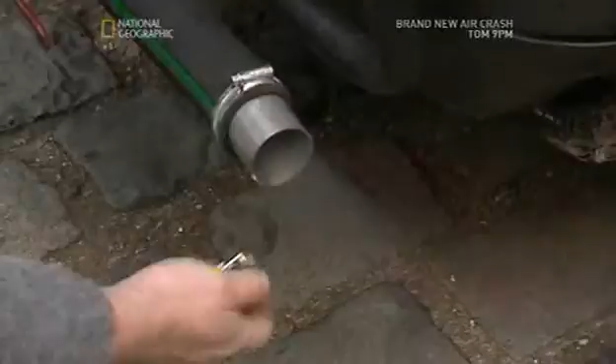This week, Dick and Jem take on their most bizarre challenge yet. Look at that. This is ace. They plan to run a pickup truck using a very unlikely fuel source. They've teamed up with a band of environmentalists who are trying to cut inner city air pollution. Look at the hydrocarbons. Wow. But will they see the wood through the trees? Or simply get lost in the urban jungle? There's nothing on the battery.

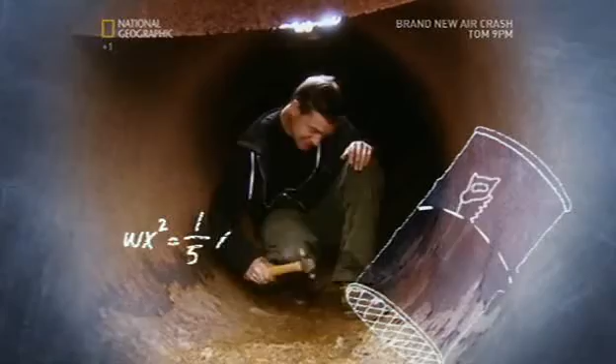Dick Strawbridge is an ex-army officer turned eco-warrior. Jem Stansfield is an inventor with a wild green streak. Whoa! Two men on a mission to fix the world. Whoa! One mechanical solution at a time. Together, they are the Planet Mechanics.

Dick and Jem's latest mission has brought them to London. They've parked up their horse box and have travelled to town on public transport. The Planet Mechanics don't want to add to the 260,000 vehicles that use London's roads every day. Most of these vehicles run on petrol or diesel, giving the capital some of the worst air quality in Europe.

But this group of people are determined to fight back. They're tackling pollution by planting trees. Trees for Cities is a charity that aims to plant 1 million trees in time for the London Olympics in 2012. The reason is simple. Trees literally eat pollution. They absorb the major greenhouse gas CO2 and concentrate it into carbon, which is stored in roots, trunks and branches.

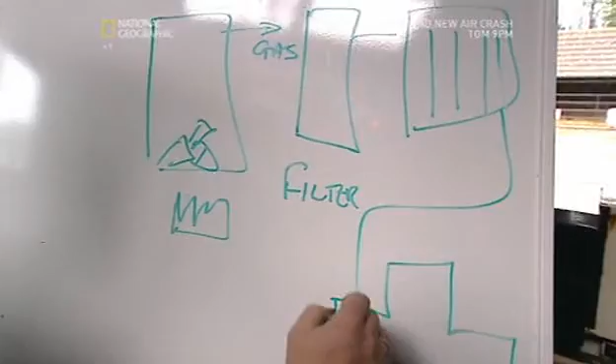I would describe that as totally brilliant, but slightly unlikely. But I couldn't be more with you, Dick. If you want to build one of those, I'm there. I couldn't be more behind you.

Running vehicles on wood gas might sound crazy, but there were over 1 million gasifiers in use during World War II. They were particularly common in Scandinavia, where oil was scarce but wood was plentiful. In peacetime, oil became readily available and wood power was abandoned and largely forgotten. Well, maybe. Until now.

Dick and Jem have bought themselves an old pickup truck and loaded it up with a vast array of old boilers, cylinders and pipes. Somehow, they've got to turn all this into a vehicle fueled only by the combustion of waste wood. To do this in a clean, green way, they're building a gasifier. Incredibly, their system should convert the wood fire's smoke and fumes into a pure flammable gas that can power a standard car engine.

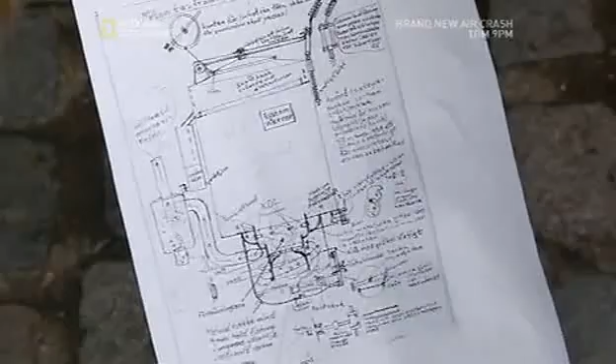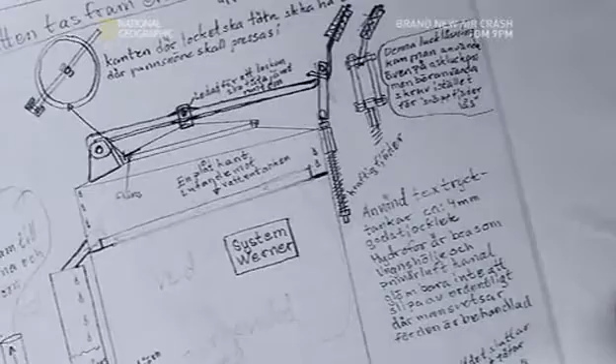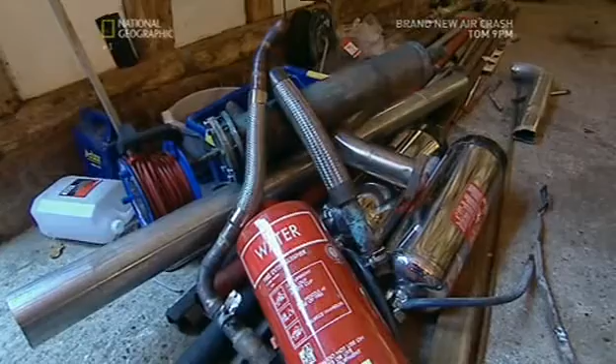Dick is feeling the pressure and is searching out some much-needed inspiration on the net. After a quick trawl, he's come up with a blueprint. But this plan does have one obvious drawback. Have you spotted it yet? Yes, the writing. Yeah, it's Swedish. The chap who has made this, it works as a system, but there's a couple of things, Dick. It's got no dimensions on. Oh, that doesn't matter. I don't know whether that's actual size, or whether it needs to be big. Right, OK. So Dick and Jem have a plan in Swedish, a pickup truck and a pile of old junk. All they need to do now is to build a car that runs on wood.

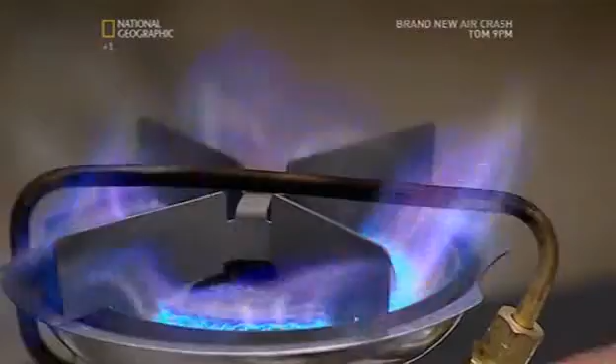The Planet Mechanics have less than 6 days to make a wood gas pickup. And one half of the team is still in the dark. Jem, I don't think you're overly convinced that we could get gas from wood, mate. I think it's brilliant. It just seems a little bit unlikely. But it's not that difficult. Look, here, watch this. It's a little cooking gas stove, a kettle full of wood. OK. If this works, Dick, I'm kind of halfway to believing the car might work.

What happens next? We wait for it to heat up and then gas will come off it. And then you will be able to light it. Well, it's pointing at you. Is this going to be the same with the car, though? You have to, like, start it a day before you want to drive anywhere. With a bit of luck, we might get a bit more heat than we're managing here. Right. I reckon we're nearly ready to try lighting that.

Hey! Look at that! That's properly amazing. I'm a complete convert to wood gas now. OK, that's a thing of beauty. No, Dick, this is what we want. Convinced? I'm totally convinced now. All we have to do is scale it up and run the car on it. A kettle scaler. I've heard of them. Dick's proved wood can produce gas. But powering a pickup truck will involve a whole load more than filling up a kettle.

Day 2 and Dick and Jem are keen to get building. Trees for Cities are expecting the delivery of a green running machine for their big planting day at the weekend. First of all, they'll need to make the producer, a cylinder in which wood burns to produce the gas.

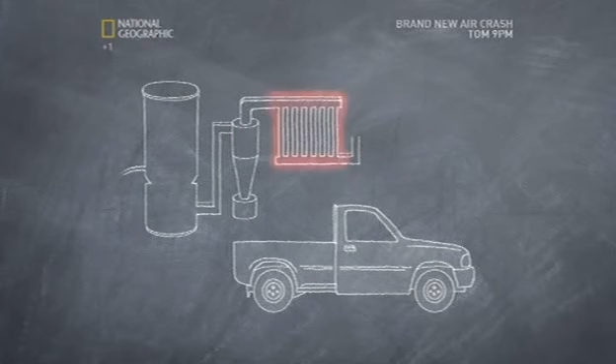Burning wood produces clouds of fine particles commonly called smoke. A filter is needed to get rid of this smoke by cleaning out particulates such as soot and ash. A radiator will cool down the gas, which could reach temperatures in excess of 700 degrees centigrade. Finally, before the gas enters the engine, it must go through a mixer ensuring the right balance of gas to air.

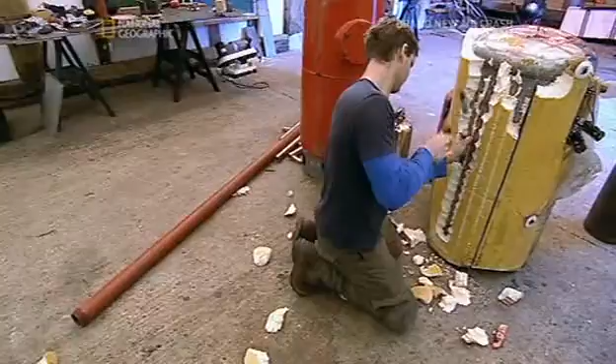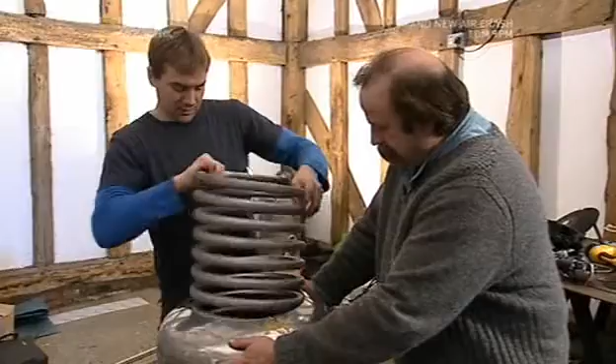This job is going to be a masterclass in recycling. This old water heater is being given a new lease of life. It will become the powerhouse of the system, the wood-burning producer. The thing is, all that's going to have to come out. It's a good-sized fuel store. Yes. Just not a good-sized hole for it. Oh. There must be something you can do with that.

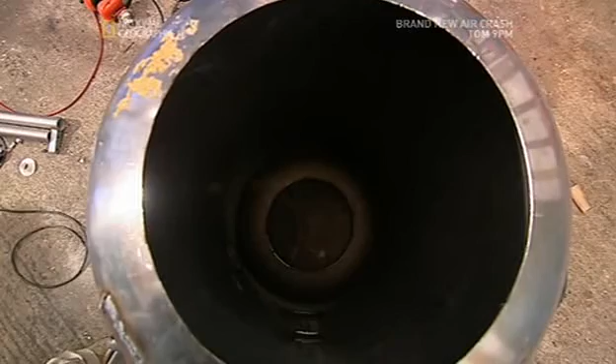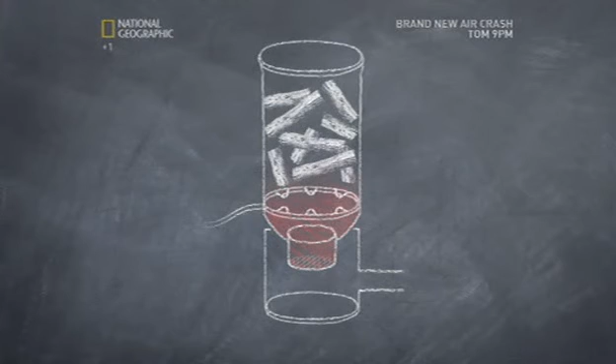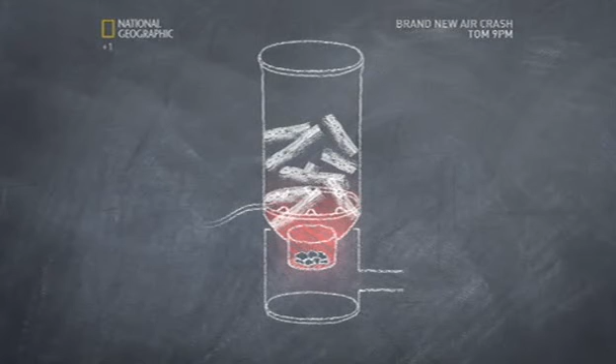Fuel will be loaded through this hole, but the real action happens at the bottom of the cylinder, the burner. Wood is stored in the producer and a fire is lit in the combustion zone. The fire is fed by air drawn in through a series of intake nozzles, ensuring a circular, even burn. As the wood burns, the process of combustion converts it into charcoal, gas and smoke particles. When the pickup's engine is turned on, the superheated gases will be sucked out of the producer at high speed.

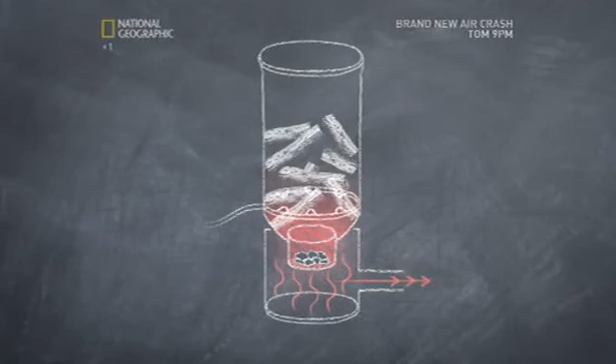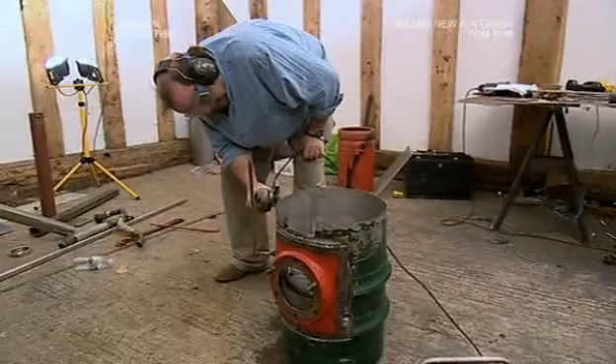Dick's making the burner from an old beer keg. He's cut out an access hatch in the burner to clear out waste ash. The charcoal will sit on this grate. He's fitted a handle to the outside of his beer keg burner. A quick turn will shake up the settled ash and should ensure a strong, steady, high-temperature burn. This is the bottom bit's done, mate. You know, this is where we can get rid of our ash, but we can still take it out from there, so we can just keep it going, continuous motion.

The guys take a break, and now it's Dick's turn to have doubts. I'm really worried about the heat we're going to generate in the middle of this producer, and the metal we're using. It doesn't seem very thick. Well, as long as we don't get the temperature up to the melting point of the steel, we should be fine. Yeah, but the thing is, we're sucking air over charcoal. And that's how they used to melt steel in the first place. Yeah. Right, I hadn't thought of it like that, but that is hot then, isn't it?

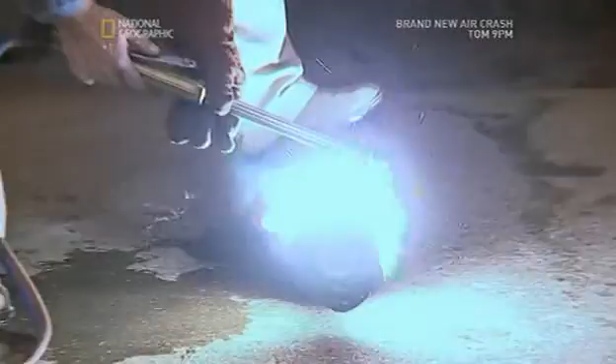Well, that's the thing. If it doesn't actually melt, but it just gets hot enough that it loses its strength, the whole thing starts falling apart anyway. The only thing I can think we can do is get the thickest, strongest steel we can find for making that central crucible in there and just kind of build it from there. Dick's found the strongest piece of steel in the barn. This old oxygen cylinder is so tough, he's struggling to slice through it. But will it be able to take the heat of the combustion chamber?

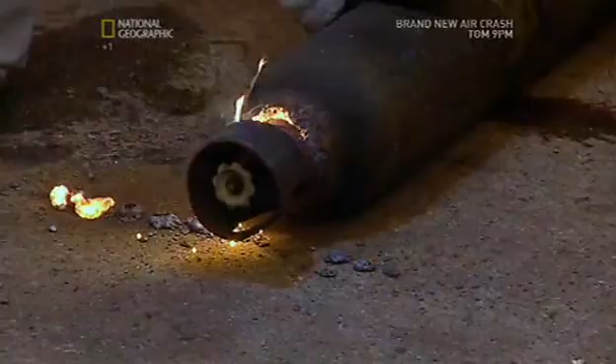As the light fades on day 2, the work carries on at a furious pace in the barn. The guys are determined to press on and produce that gas producer. Dick. How are we doing? So, all the air nozzles. So we've got ourselves a combustion zone. Right, it's the other way up. Yep. So all the wood drops into this area. Yeah, and then where the air's coming in, that's where it burns in there. Suck it in through here. And if you've got the big bit. So this is our heavy.

This must be hot. Yeah, so once the wood's burnt, then all the gases, the really hot gases come down here. This is the reduction zone where the high temperature chemistry takes place. Those hot gases then become flammable gases. Vroom, that drives the engine.

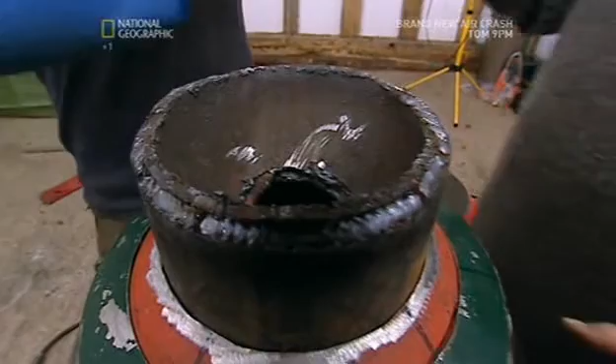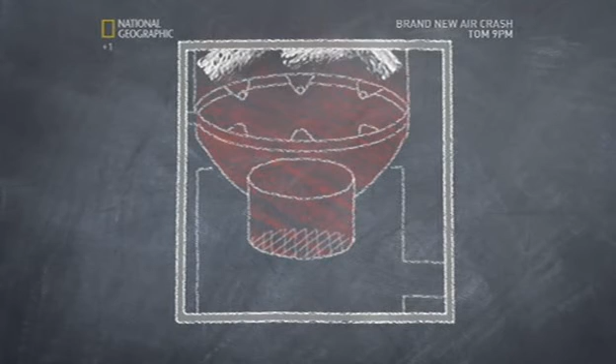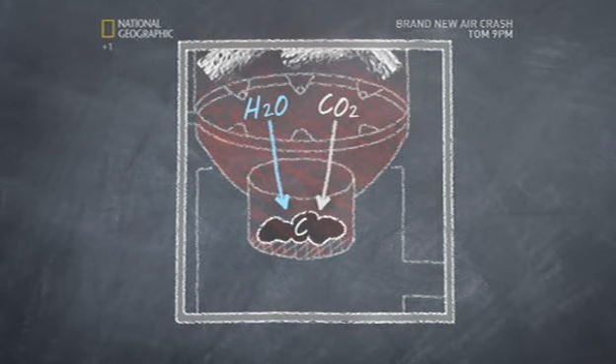Gasifiers are highly efficient. Unlike steam engines, which waste energy up a chimney, they are sealed units which chemically process their own exhaust gases. Wood is a dense solid fuel which produces large volumes of carbon dioxide and water vapor when burnt. All this gas is sucked into the reduction zone, where it reacts with the high-temperature carbon of the charcoal. This reaction reduces the number of oxygen atoms in the CO2 and H2O and produces 2 new highly flammable gases, carbon monoxide and hydrogen.

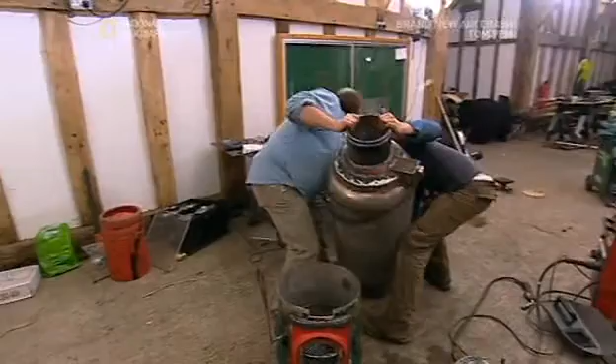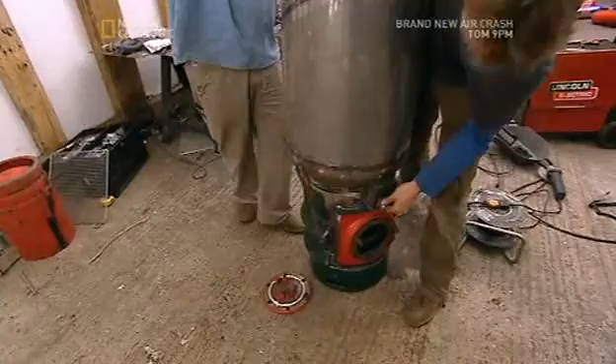The 2 sections of the producer are finished. Hands out. My hands are out. It's time to snap together Jem's recycled immersion heater and Dick's beer keg burner. Jem, that is positively Frankenstein.

It's day 3. The gas producer is finished and the Planet Mechanics are ready to tackle stage 2 of their wood-burning car, the filtration system. The gas leaving the producer is still very smoky and contains impurities that need to be cleaned out before running into the engine. But with a temperature in excess of 700 degrees centigrade, this superheated gas will quickly burn out most filters. But Jem thinks he may have a solution.

A filter that doesn't need filter material. It works just like a cyclone vacuum cleaner. Amazing as it may seem, this appears to be all there is to cyclone filtering. That is so simple. I'll take it this is representing the suck of the engine. Yeah, so this little fan here sucks air up and blows it out there. And then dirty gas can come in, swirled round, heavy particles flung to the edge and drop out into the collector. So that's just the same as a vacuum cleaner, basically.

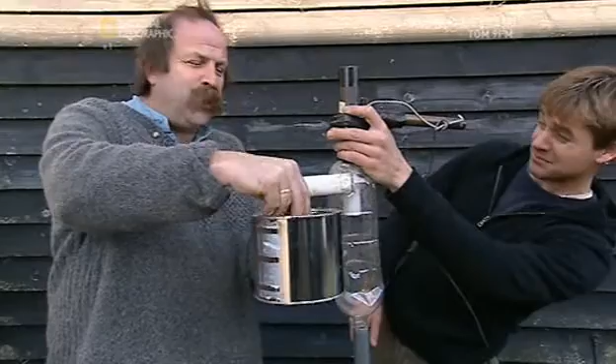Yeah. Give it a go, come on. Connect it up. Right, here we go. I think you'll be pleasantly surprised. Oh, dirt. You're going to feed some dirt in? Yeah. Is it running? Here we go. Look at that. You can see the cyclone. That's impressive. Look at it collected in the bottom there. How much is coming out the other end? Not a lot. No, don't do that, Jem. There's tiny weeny particles that make it through. But that's really efficient considering this is the equivalent of our engine sucking.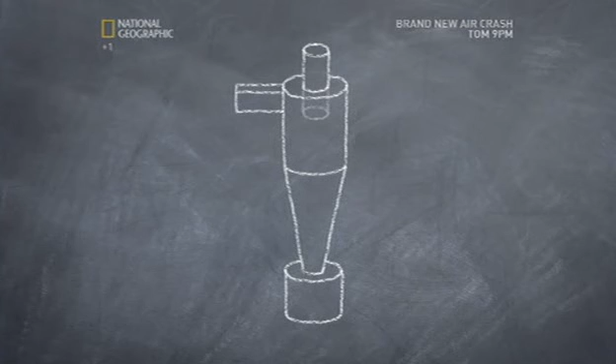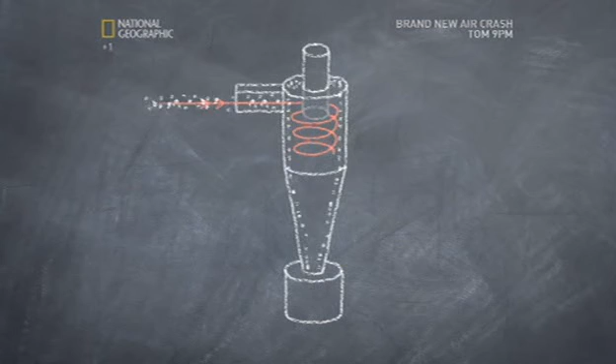The gas will enter the cylinder and be forced downwards in a spinning motion. Centrifugal force will push the heavier ash and soot to the sides of the cylinder. While the impurities fall to the bottom of the cylinder, the clean gas, now minus the smoke particles, rises and is sucked through the system towards the engine.

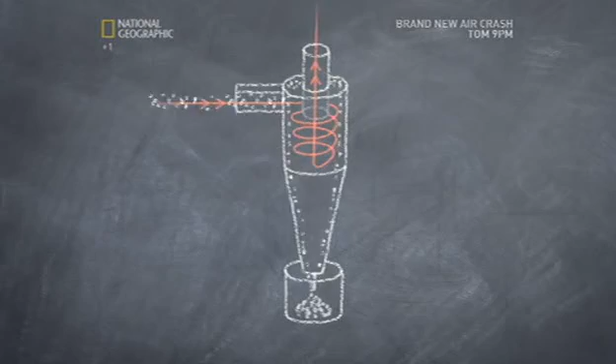Right, we have got a problem, of course. Which is? Material and the strength. We've got 700-degree gases being sucked in here. You don't think this will do it? No, but all we need to do is replicate pretty much this in steel, slightly bigger. But without that, we don't even need that. No, we lose that. That's a very simple system, mate. Yeah, it's great, isn't it? Out of metal. Let's go find some metal bits.

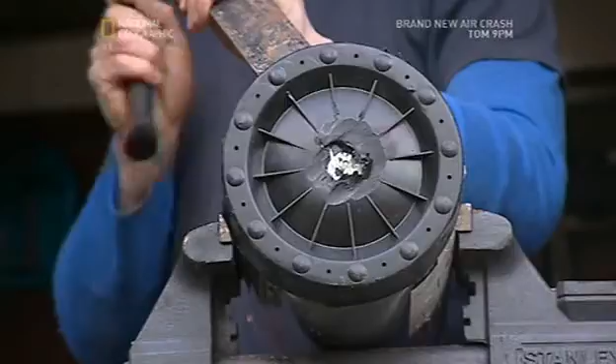Jem gets to work on an old fire extinguisher to make up the cyclone filter chamber. Dick is sorting out pipes to lead gas in and out of the filter and a simple dispenser to funnel off the waste.

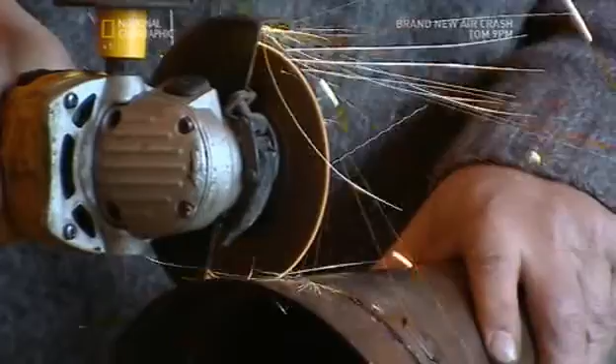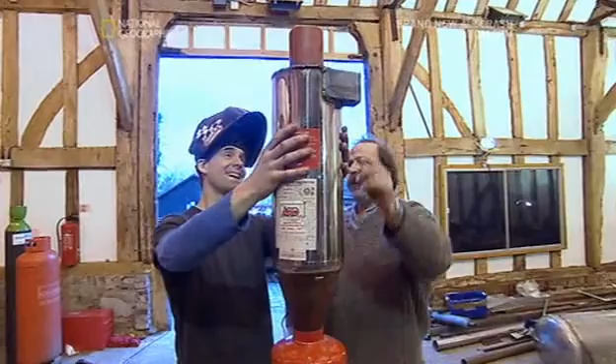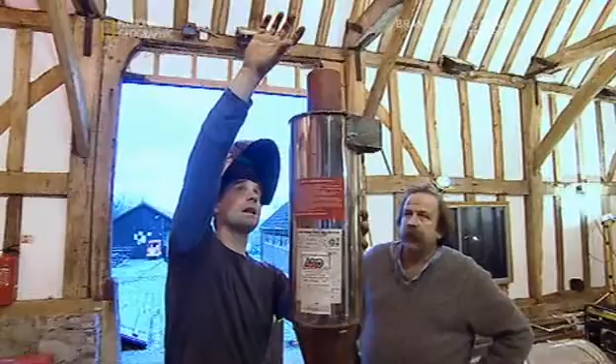Ready for this? Yes. Right, where's all the bits? That's our ash collector. Aschenbecher, I think it is. There we go. Spins around. So, hot gas in there. Cyclone. All the dust gets shaken out and down the bottom there. And the beautiful, clean, flammable gas comes out the top, up the inside of the cyclone. That's nice and strong, isn't it? It looks really good in there. They're so simple.

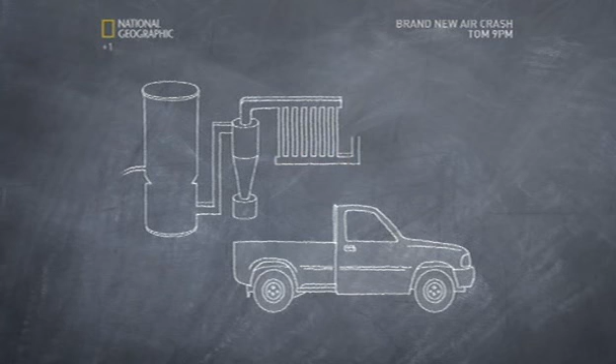The filtered gas is still very hot, and now it needs to be cooled down by running it through a radiator. When gas heats up, it expands, and the molecules are spread out thinly over a greater volume. If the gas is cooled, it will contract, and the molecules will be much more concentrated. The greater the concentration of molecules the gas has, the more power it will deliver to the engine.

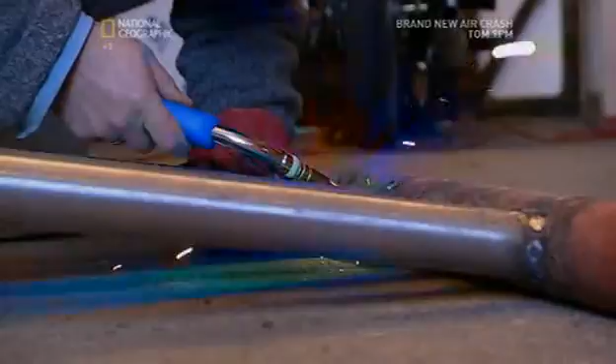Dick scooped up a water pipe and some tubular handrails. The hot gas will run through this series of pipes, which will be mounted on the back of the truck. When air hits the radiator, the temperature of the gas should drop rapidly.

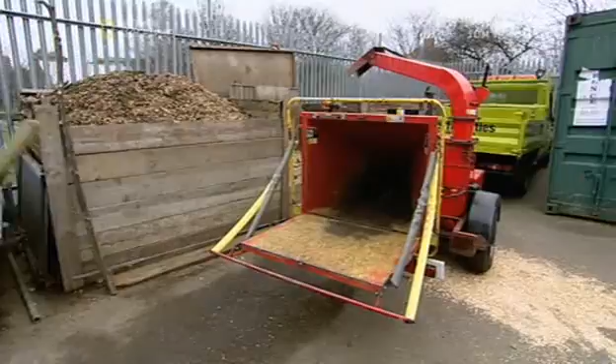The construction is progressing well, and the guys now need to start thinking fuel. They need a load of old wood, and they know just where to get it. I thought you planted trees instead of cutting them down. We do, but we've got to look after them once they're planted, and this bough's rotten, so we've got to take it out. But what we're going to do for you, we're going to need some wood.